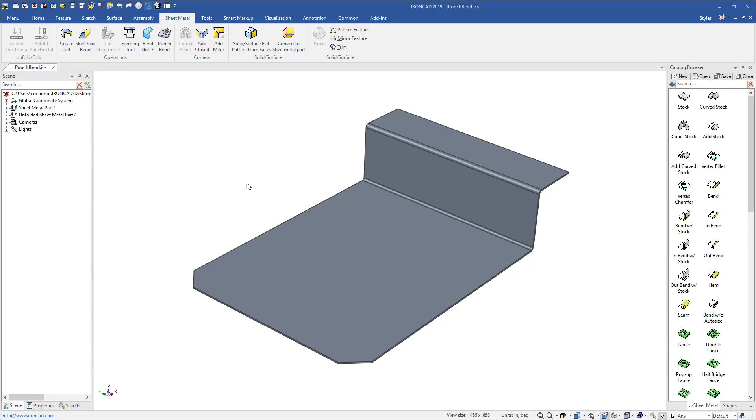Sheet metal has a new option to create punch bends. By default, our catalog ships with various form shapes and punch operators that you can just drag and drop out onto your sheet metal. But if you want to build your own custom punch bend, you can basically select the tool, select a face or a stock face, and then you can actually draw your profile using our profile tools.

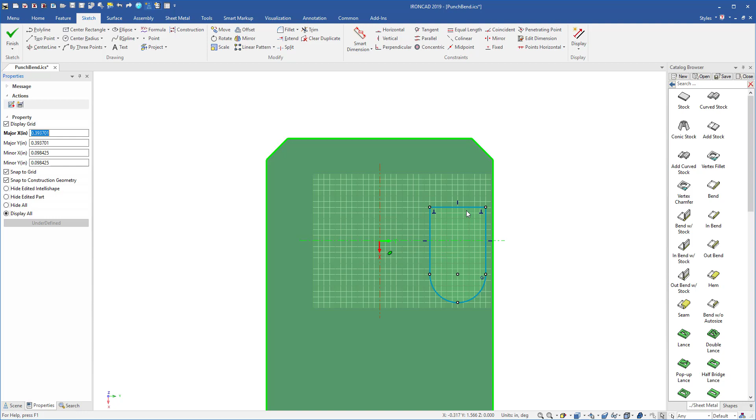For example, I'll just go ahead and draw a rectangle here, and I'll add a circle to it to give it a little bit of an arc here at the top, and we'll trim off the excess geometry, and we can scale these around however we want using our traditional sketch tools.

Once you hit finish, it'll put you into the punch bend operator, where you actually select the edge that you want to use for the bending operation, and the rest will be actually where the punch is and the fold is. You can adjust your angle and also various sheet metal operators like your bend allowance, and you can choose to have a thickness to where it actually has a thickness cutout and a bend, or a laser cut.

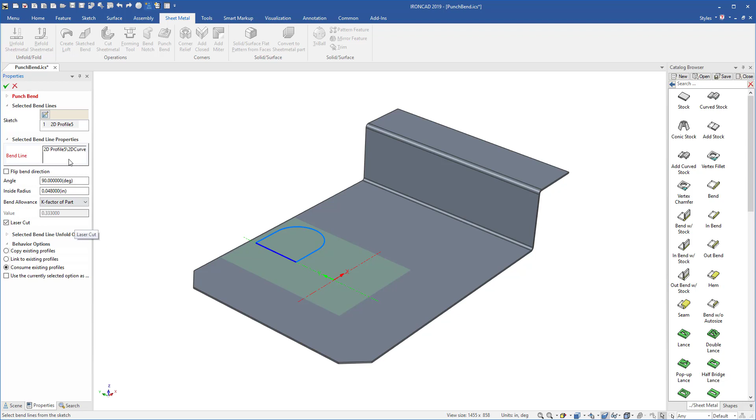Let's choose laser cut to see what that result is. We'll go ahead and hit OK. You can see it actually folds that and bends up our shape. If we go into our unfold, you can see now that this is a laser cut. There's no thickness to this, and we actually have our bend line.

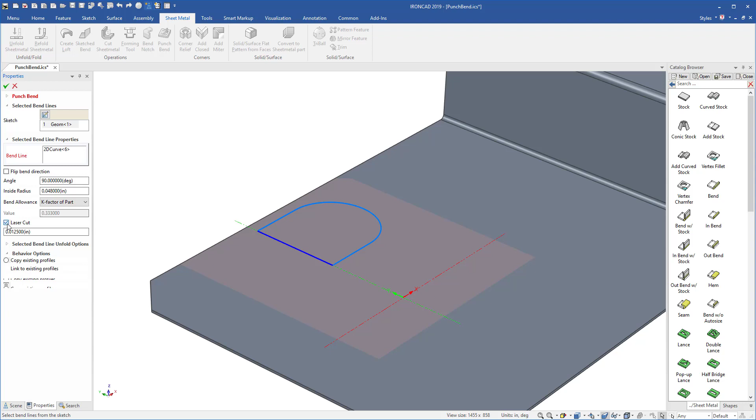So you can have a true laser cut, or if you go back to your feature by selecting onto it, right-clicking, and get back to your feature operations, now you can give it a thickness. Say we give it a 0.0125. Go ahead and hit OK.

Now when we unfold, you'll see there's actual thickness to that, and you can actually use that as a cut operation and then a punch or a bending operation to fold that. So there's a couple options there when you create those. And your shapes can be pretty custom as well.

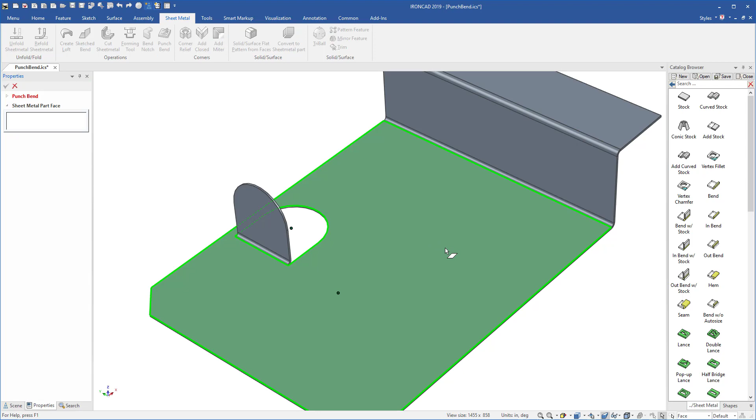Well, this is just a simple shape, but if we build another one here, for example, we'll just go over here and place one here. We'll just use our same tools to create a shape. Create another one here. Maybe we want to create a U. Let's actually move this down a little bit. Down here, we'll create a U shape. In our case, use our trim tool. We'll trim out this excess geometry and hit finish.

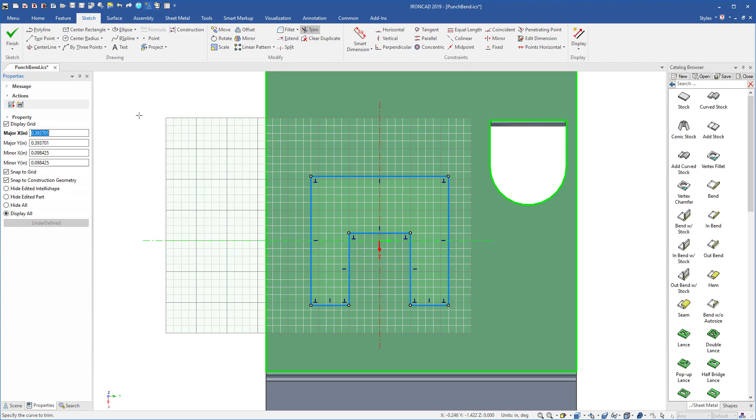In this case, we want to use this as our bend line. And notice I only need to select one of these. I don't need to select both because these are both collinear. So if it picks up one, it'll actually go all the way across to create our bend for us. Again, you can use laser cut or a thickness, but we'll use laser cut in this case and hit OK.

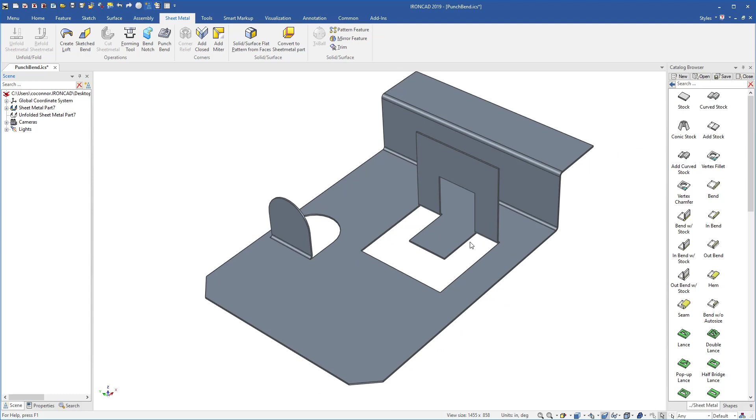And notice it'll bend along that entire edge. That's anything that's collinear with it as a bend, and everything else will be folded up. So a very handy tool for creating these punch bends. The nice thing about this, these are features that can be moved around using the tri-ball, for example. You can move and position these to precise locations.

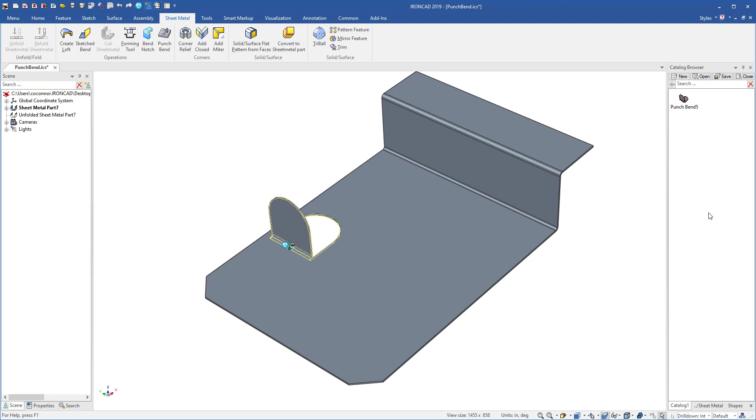You can put smart dimensions on these to drive them parametrically to other objects or faces on the part. You can delete these individually. You can also store them in catalogs. If you create a new catalog, I can take this feature, drag it, and drop it into a catalog, and then reuse it on my sheet metal.

And again, I can unfold that, and it will maintain all those settings that were set with that feature stored in the catalog. So a very handy tool to create your own punch bend operations that can be done on any stock element on the sheet metal. So whatever plane or stock face, you can add those punch bends onto.